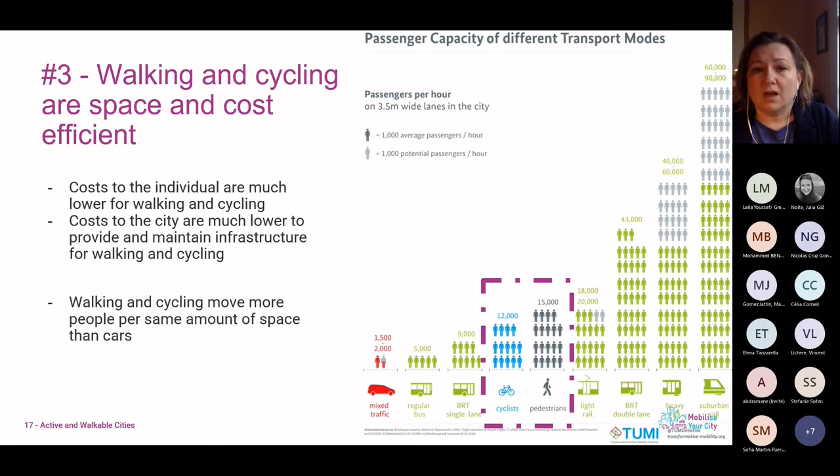Next slide. The third thing, from a mobility perspective, is that walking and cycling are space and cost efficient. The costs to the individual are much lower for walking and cycling, essentially free for walking. And the costs to the city are much lower to provide and maintain the infrastructure for walking and cycling as well. We also see that walking and cycling is space efficient. The graph on the right is from TUMI, and it looks at the capacity of passengers per hour in a 3.5 meter wide lane, and walking and cycling has a high throughput, especially compared to mixed traffic. Next slide.

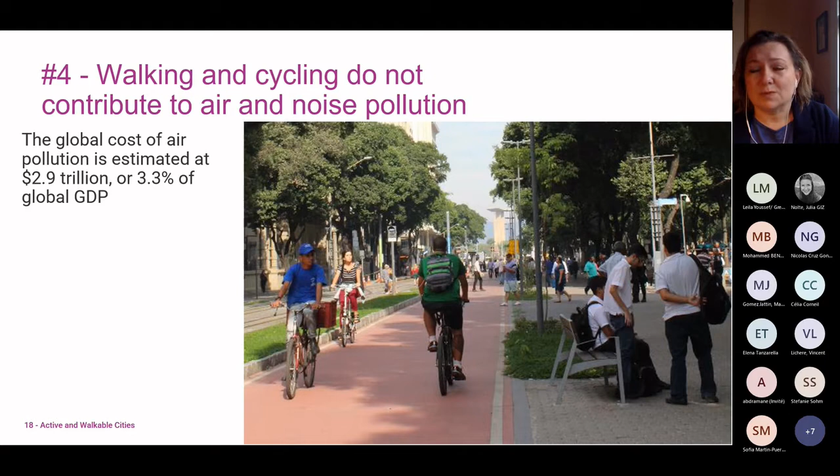Walking and cycling do not contribute to air and noise pollution, which is a big issue in cities. The global cost of air pollution is estimated at $2.9 trillion. More research is coming out talking about the impacts of air pollution on health and noise pollution on mental health, especially for the cognitive development of children. I think we're just beginning to scratch the surface of how detrimental air pollution is to us. Next slide.

Walking and cycling are inclusive and equitable. They're the most affordable forms of transport, and they're available for a lot more people, the older and younger alike. Kids can't necessarily drive and can't necessarily navigate transport systems, and older people may prefer to walk or not be able to drive as well. Next slide.

The sixth reason why walking and cycling are great is that they promote health and well-being. Non-communicable diseases are killing 41 million people a year, 71% of all deaths globally, and 77% of those are happening in low and middle income countries. By walking and cycling, you're getting exercise and helping protect your health. There's also a well-being aspect: you're interacting with your community and your environment. And the last piece is mental health, which walking and cycling can also help with.

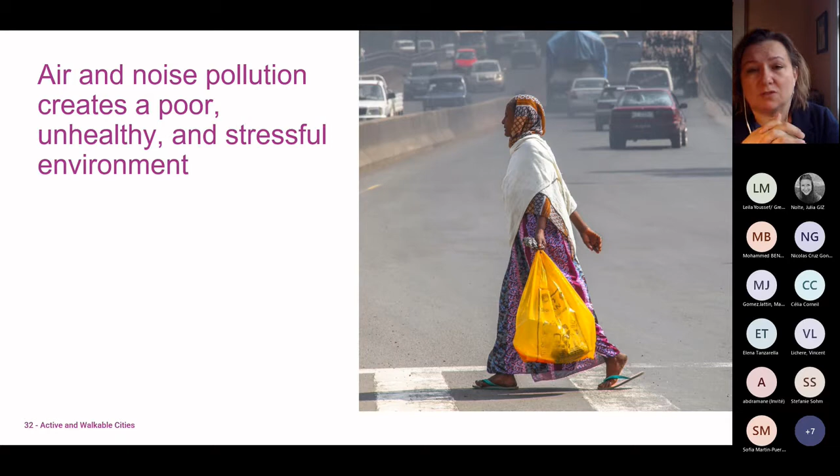Air pollution and noise pollution create poor, unhealthy, stressful environments, especially from vehicular traffic.

And really critical are the crossings—they're chaotic and dangerous with fast traffic. It's not always easy to cross the streets. These are really important things to consider when you think about walking and cycling.

And I'll stop there. Thank you, Verena. Thank you very much, and perfectly in time still, so no worries.

Thank you very much, Aimee, for that quick run through of how important active mobility is, and also some insights on the barriers. We wanted to take some time to dive into this topic a little bit deeper, to reflect on the challenges and barriers that, maybe in addition to the ones Aimee just named, you're also experiencing in your work or in your daily life.

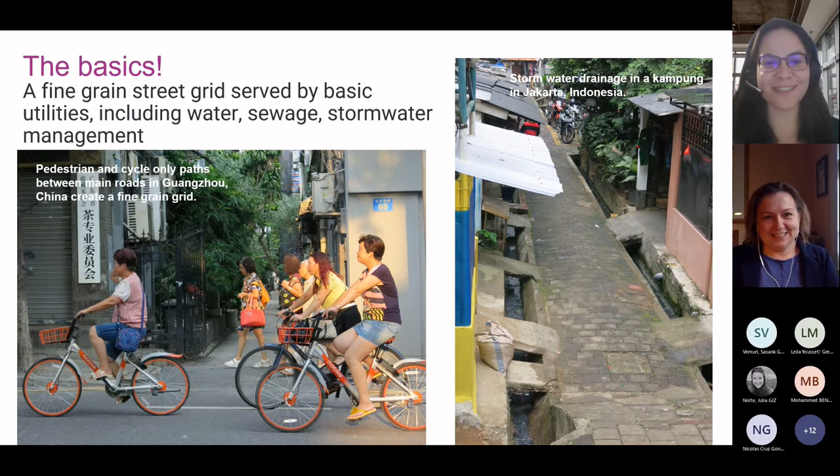Thank you so much, and thank you all for contributing to the barriers. I think, again, we all kind of face similar things, even though they're in very different contexts. So with the solutions, it's kind of a similar thing - there's some key principles to making walking and cycling better.

The first, again this starts where I left off, is the basics, and that includes having a fine-grained street grid. Like in the picture on the bottom left, it's Guangzhou, which has a street network that is also intersected by pedestrian-only or cycle-only paths between those main roads, allowing for a lot more connectivity for walking and cycling specifically.

The other thing is having your basic utilities taken care of, including water, sewage, stormwater management. This is going to become increasingly important as we deal with climate change and the climate crisis. We have to invest in these basic services because we're going to see flooding and just a lot more intense events happening.

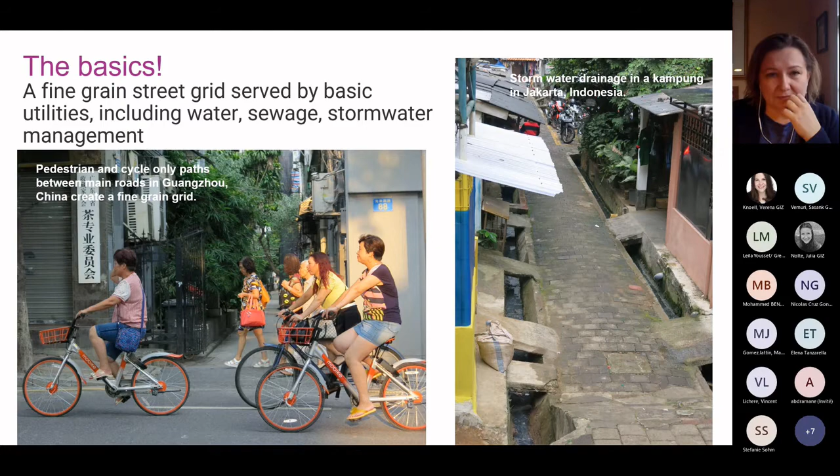The next slide, hopefully y'all can see - if you guys can't see it, just holler - is dedicated protected networks. I want to focus on networks because it's about being able to use these networks to reach the whole city. A lot of times people will put in just one bike lane that goes along a main corridor, but doesn't really connect to anything. If you're really thinking about how people are moving through the city, they're usually not just on one main corridor, they're trying to connect to different parts of the city. So networks are really important.

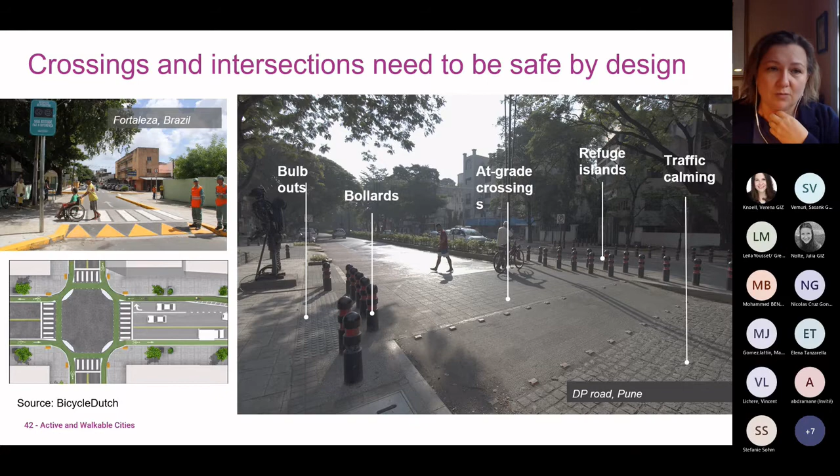On the picture on the right, this is from Pune. You see all the different components of making a safe crossing: bulb outs, which minimize the crossing distance; bollards that protect from encroachment; at-grade crossings, the tabletop crossing; refuge islands between multiple lanes of traffic; traffic calming devices like tabletops, raising the cars having to come up slows them down, as well as different paving styles. Then thinking about cycling, how do you prioritize cycling in the intersection, make it visible to drivers and other modes - that's really important to do as well.

They need to be sufficiently wide, a sidewalk for both cycling and walking. For a sidewalk, it's a complex system - there's a lot of activity that happens there. So you have the frontage zone, which is kind of the place of coming in and out of buildings.

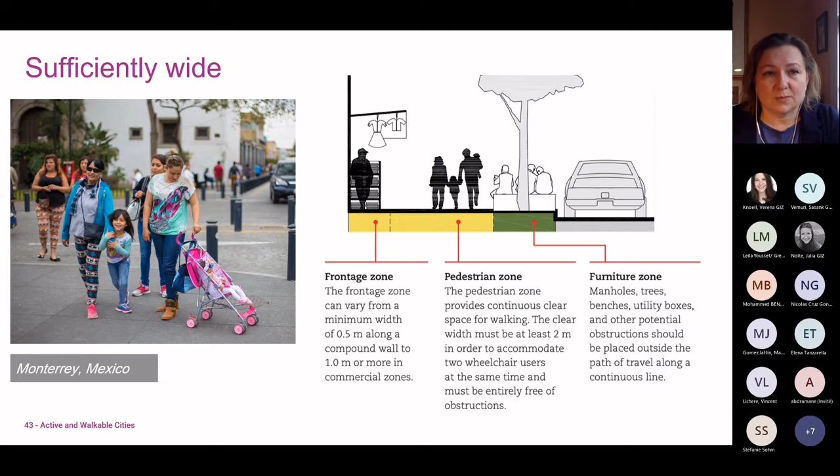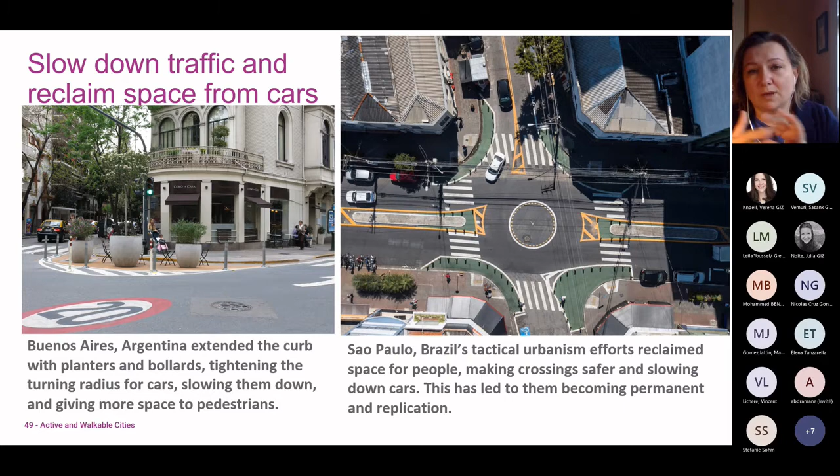This is in Nairobi, but again, having protected space, having shade from trees, having seating, and active frontages are all really important. Another thing that came up in barriers is that traffic is too fast, so you can slow it down by reclaiming space, essentially slowing cars down by design, because enforcement can be difficult. In Buenos Aires, they extended the curb through bollards and planters, put in some seating, and made it a low speed zone, shown by the 20 kilometers per hour sign. In Sao Paulo, Brazil, they also reclaimed space by extending the curb and creating a roundabout. All of these things help slow down traffic.

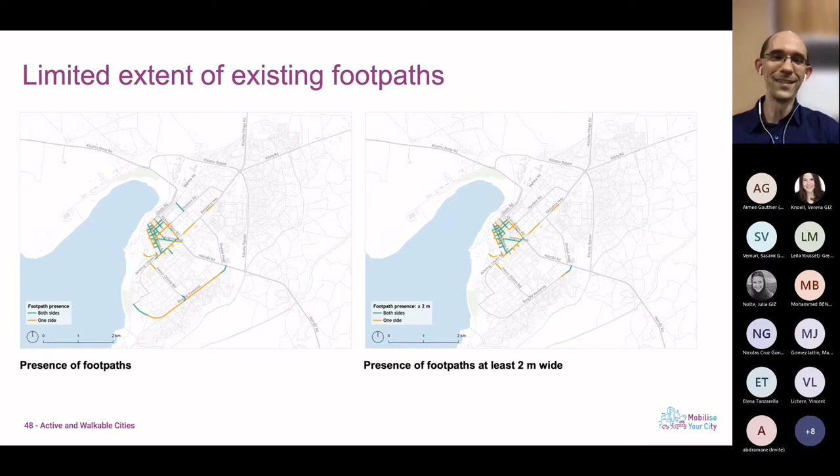We mapped this out as part of the mobility plan we helped the city prepare. What you can see here is that very few streets in the whole city had footpaths on both sides. A few more had a footpath on one side. If you filter that down to streets with at least two meters of clear width, and Aimee talked about the footpath zoning system and the need for minimum space so two wheelchairs can pass and you can handle the volumes, then there are even fewer paths that meet that requirement. If you further refine it to streets with footpaths where the two meters are clear, it's even fewer. So there is definitely a need to improve the facilities.

Another challenge has been that a lot of streets don't have proper crossings, especially outside school zones, this was a real problem. Speeds were very high, and it was hard for people to move around. Same thing with cycling, lack of cycle facilities, people moving in mixed traffic. And cycling is predominantly young male risk-taking cyclists. As Aimee was saying, if we continue to expect people to cycle in mixed traffic, we're not going to open this up to the full community.

Another thing that was evident was that a lot of the recent road projects had widened the carriageways, but led to a lot of safety challenges. You can see in this case where there's a service lane alongside this newly expanded road, and the community had to come out and build a speed bump in it to get the speeds down and make it safe for kids to cross on their way to school.

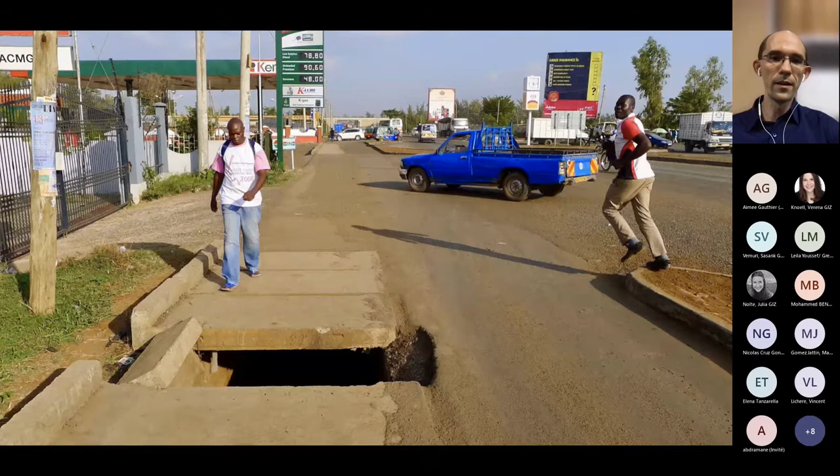So these streets were definitely not safe by design, and that led to a lot of challenges for the communities. And then the construction quality was very poor, so the space that was supposed to be used by pedestrians had a lot of flaws like this. Drainage covers started to cave in, and it really wasn't safe for people to move around.

That meant that these very corridors that had been upgraded in recent years actually became the epicenter of traffic crashes in the city. You can see this whole stretch here on this big highway that stretches through central Kisumu, seeing the majority of the fatal crashes over the years since the road was upgraded.

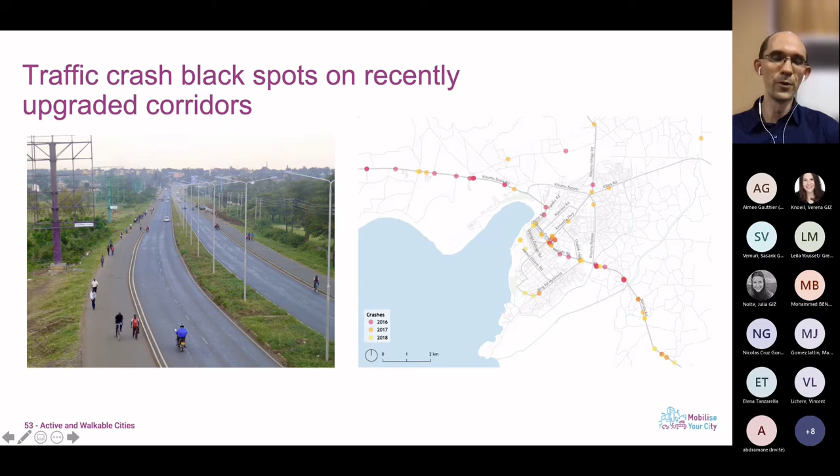So those are some of the key issues that the city had. To help address this, ITDP and UN Habitat went to support the city in developing the Kisumu Sustainable Mobility Plan. This plan outlined a comprehensive set of interventions dealing with all realms of mobility, from public transport to parking to land use transport integration. One of the key elements was NMT, because given the city size and the fact that more than half of trips are either by foot or cycle, it was key to invest in this area.

So the proposed NMT network that we developed looked at key issues like where are the black spots, where are the heavy volumes of pedestrians and cyclists that we need to accommodate with better facilities. We came up with this 100-kilometer network of improved walkways, and in addition, 31 kilometers of cycle tracks, making sure that all the main arterial streets, including all streets with 2 or more lanes of mixed traffic per direction, would have cycle tracks.

There are additional opportunities for greenways along the lakefront to serve as an alternative to the busier streets, and also to enhance the tourist potential of the city. Then the 28 kilometers of those new highways that are having a lot of safety challenges—that was one of the key priorities. And then finally, improving safety in the school zones.

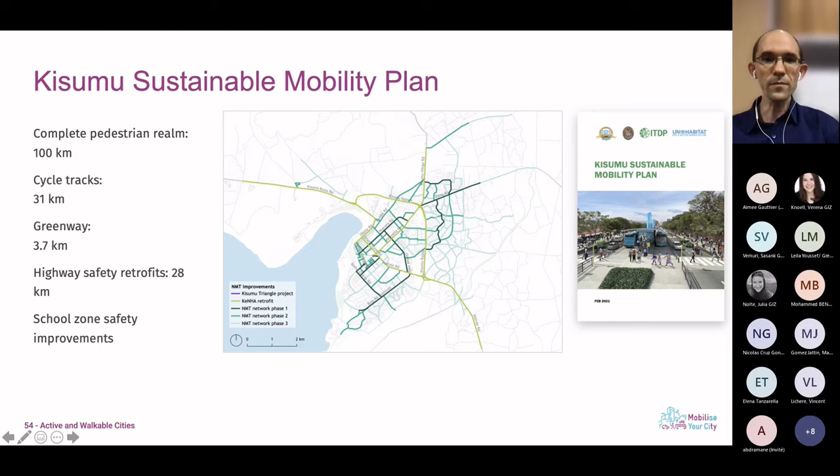So out of that network, even as we were preparing the mobility plan, the city embarked on this demonstration project to start upgrading the walkways. This was known as the Kisumu Triangle Project. It covered 1.5 kilometers of streets in the city center, with a total cost of about 241 million Kenyan shillings, about $2.2 million at the time.

It was financed through a World Bank project, where the World Bank gave a large loan to the government of Kenya. The Transport Ministry in turn gave out smaller grants to individual cities to implement these different types of urban development projects, including the Triangle Project. So it included a variety of interventions.

The footpaths, but also better crossings, the street furniture—there were a lot of new benches, landscaping. The drainage lines were overhauled because the city experiences a lot of flooding; it's barely higher than the level of the lake. So you really need to ensure there's good drainage if you want these walkways to be free of waterlogging.

And then finally, a nice element was that public toilets were included. We have a lot of issues with equitable access to toilets in public space in Kenya, so that was a nice element. There were 2 public toilets introduced as part of the network.

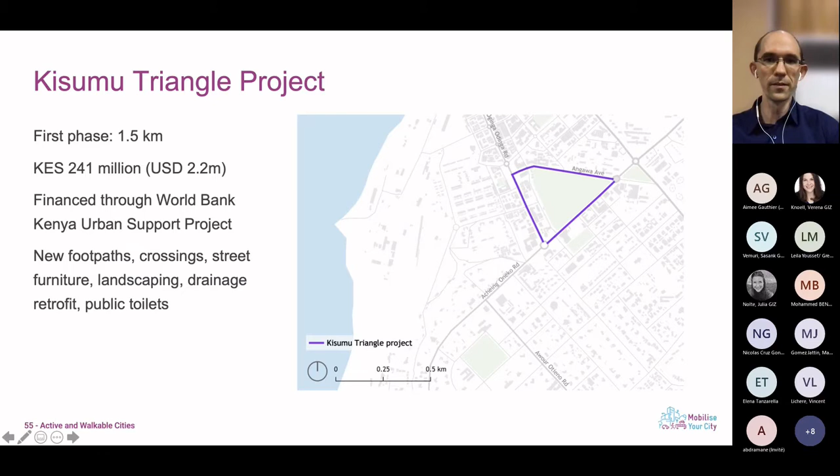So there was a lot of community participation that went into this, going all the way back to 2016 with the first street design workshop—bringing engineers out to see the streets, to understand the issues that pedestrians face and the really abject state of the existing infrastructure, and then brainstorming on solutions.

And this was the result: the new wide walkways have enough space to accommodate pedestrian movement, but also the economic activities happening in the city, and it really transformed the face of the town.

You can see that there is a lot of care put into maintaining the existing tree cover, which was a big break from the way road projects are normally implemented in Kenyan cities, because usually the first thing we do is go in and cut all the trees, and then we have a blank slate to work from. But in Kisumu they took a really different approach of maintaining these trees and customizing the design in each case to make sure the trees could be preserved.

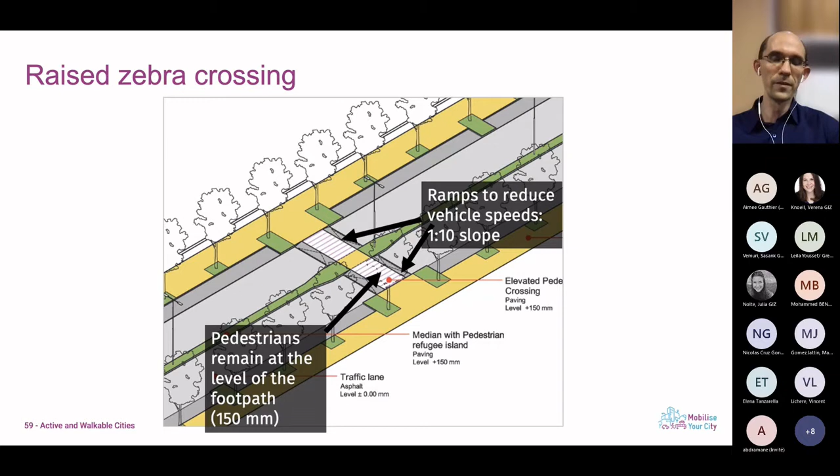Also paying attention to the surfacing and finishing so that there's universal access. Another key thing was making sure the crossings get safer by implementing raised zebra crossings with ramps for vehicles, keeping the crossing at the same level as the medians and footpaths so people have a single surface all the way across. It's actually steep enough for vehicles to slow down. So it's not just an aesthetic intervention, but it's really ensuring better safety through the geometric design.

And then finally, protecting the footpaths - installing bollards, raising them above the carriageway so there's adequate drainage, and making sure these are there for the exclusive use of pedestrians, so we don't have a lot of encroachment from cars on the new footpaths. So that's the product of phase 1 of the NMT projects.

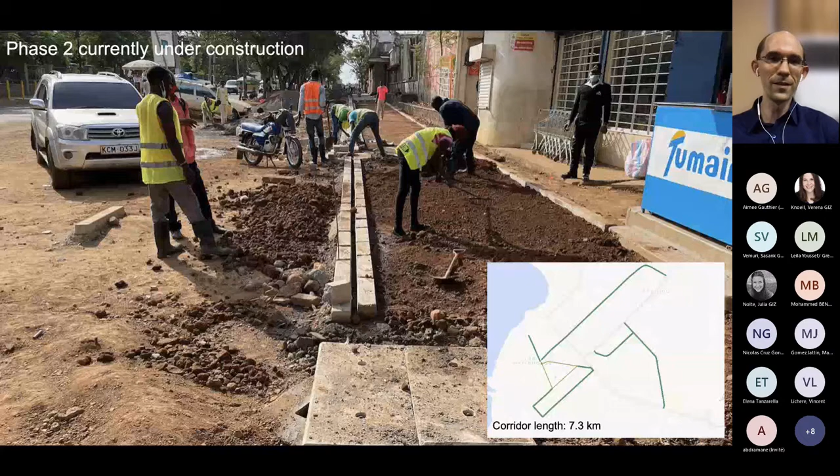And now the city is currently implementing the second phase, which has just over 7 kilometers of footpaths being implemented around the city. The second phase also includes some cycle tracks. So we're hoping this can become a good example of inclusive infrastructure and attract more engineers and planners from around the country to see how to build good facilities.

So that's Kisumu. And then the next case study I want to get into is Addis Ababa, where the city's been making a big effort to invest in the walking and cycling environment, and has been able to scale up those efforts even beyond Addis to the national level.

So again, a lot of challenges, very few cycle facilities across the city, so people are left to fend for themselves. Poor quality walkways, drainage issues, and in some cases the walkways are pretty decent, but they're just not big enough for the volumes of pedestrians who are there.

So the city went about creating this NMT Strategy. It was launched in April 2019, and the strategy is basically a 10-year roadmap for improving the NMT environment. Alongside the 10-year strategy, the city adopted a 3-year implementation plan that went into the specific projects, who should implement them, and how much they're going to cost over that short period. The city's now preparing its second round implementation plan going forward.

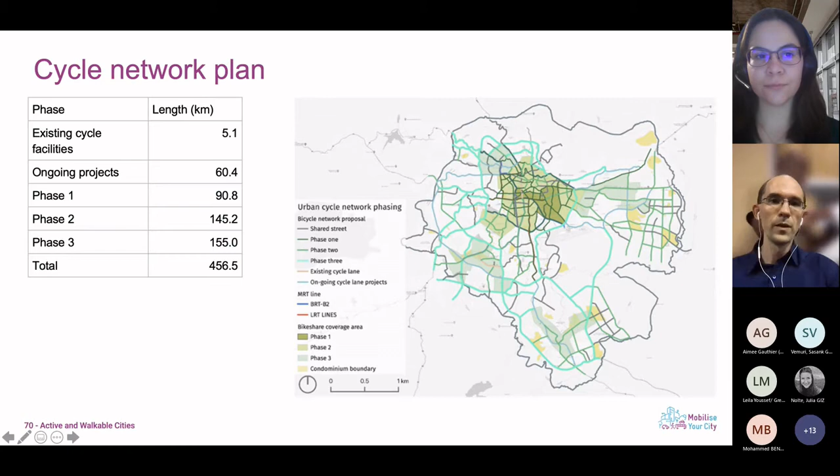So the city went back to the drawing board, trying to learn from these mistakes, and came back with a more contemporary design for a protected bike lane. This was on a corridor known as the Jemo Lebu corridor. With support from GDCI and other partners, the city implemented this tactical project at a very reasonable budget, to get something out there to test out the design and see how it would work.

And so that's continued to attract users, but it still has some issues. There are certain places where cars get in, and so the city's been trying to innovate further to see how to define these facilities so that they're more clearly differentiated from the roadway.

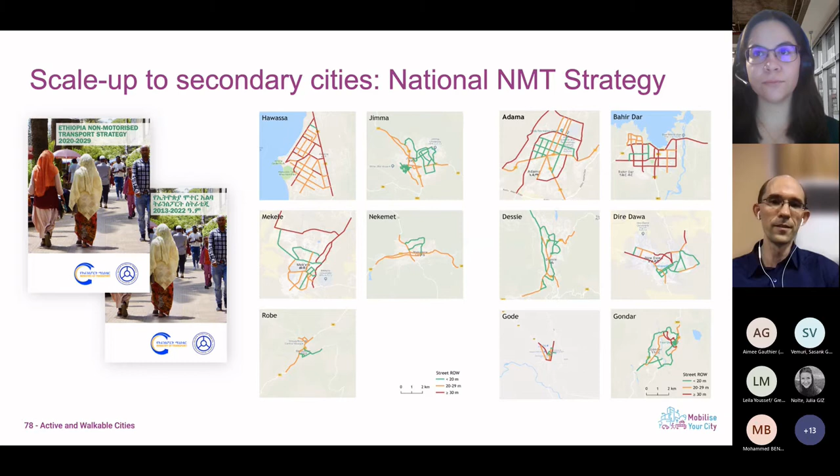Just to conclude, one of the nice developments in Ethiopia has been the scale up. Following the success of the Addis NMT strategy, the Ministry of Transport also prepared an NMT strategy at the national level, and it identified goals for the key secondary cities and how to scale up these measures across the country. And it's had strong political support. The Transport Minister chairs a national NMT steering committee that brings together the different agencies involved in the design and planning of the NMT environment, and they're helping to see how to bring good NMT facilities to all of the important towns and rural centers across the country. So with that, I'll wrap up, and we're happy to take any more questions.

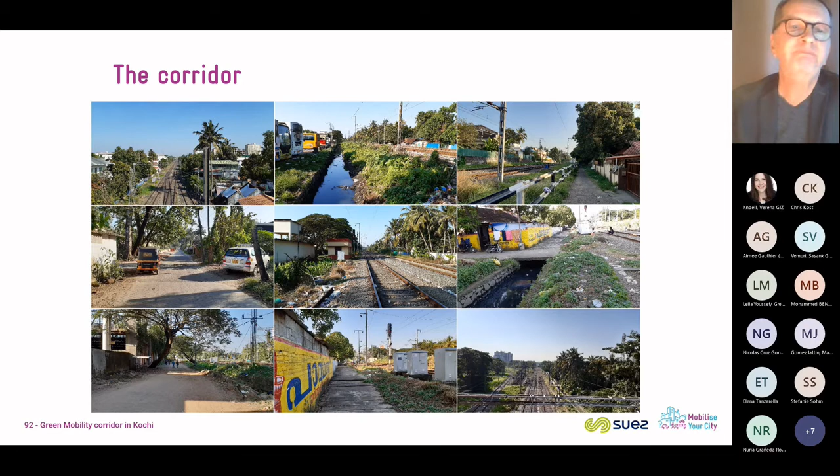So it's a project of urban mobility, but much more than that. There is this goal of improving the connectivity, creating or improving links between the bus terminal, the railway and metro stations, the stadium, and the hospital. The links were to be developed with the city center, and also the project is seen as a way to relieve congestion on parallel roads.

But there is also a component of urban management: improving safety and security for all, cleanliness, better control and surveillance by authorities. It's a place that is impossible to manage today because there is no access, and improvement of the drains. More widely, inclusion in the city, step by step, turning this somewhat backyard area into a lively urban space, including social and economic activities.

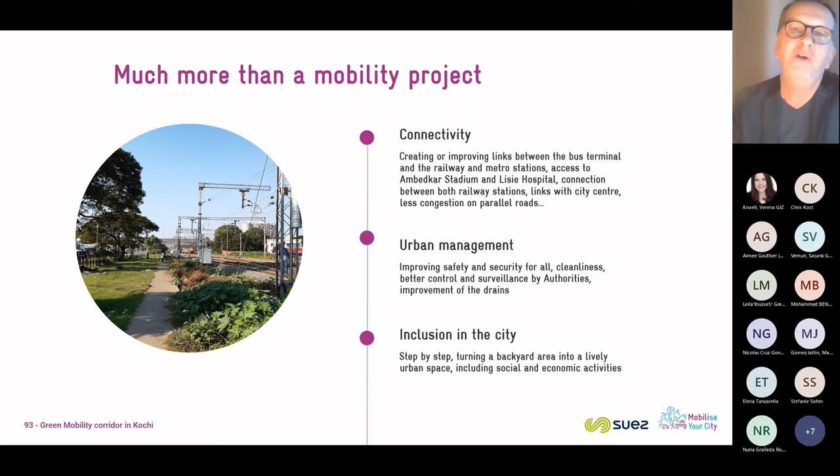And the goal of the project is to solve these several problems with one solution. Next.

So the project was developed with 4 components. The first one was really non-motorized transportation, what we call the green corridor, adapted to walking and cycling. In parallel to that, there was the idea of developing electric rickshaw services.

Third component: development of hubs and connections to the city centers, so connection between the corridor and perpendicular roads, and then development of social and commercial activities along the area. Next.

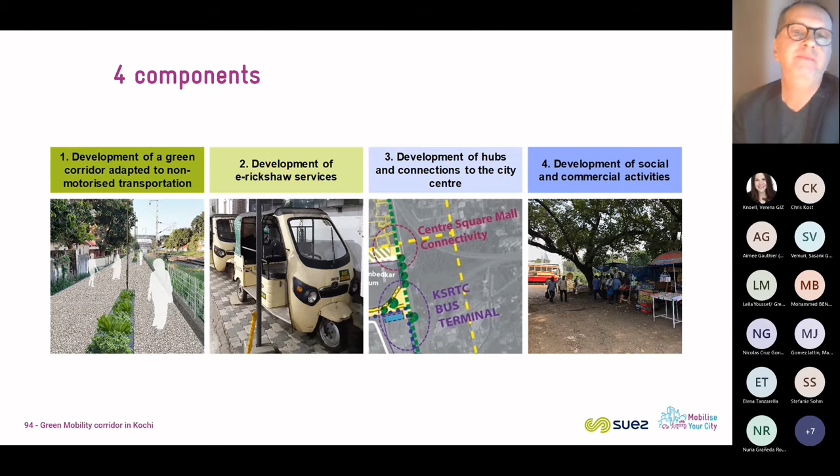The study lasted for about 6 months. We began with data collection: site reconnaissance, topographic survey, some mobility surveys too. So we made counts of vehicles, of pedestrians, and also some interviews of people to understand the origin and destinations, the purpose of the trips, the expectations, the problems. We also surveyed the land ownership along the corridor.

Based on that, we made an urban and mobility diagnosis that helped refine the objectives of the project. There are, as always when this kind of project is launched, already objectives, but the diagnosis helped to have a clearer idea of what should be the target. This first part lasted about 3 months, and then 3 more months to develop the mobility improvement plan and evaluate it. Next.

We proposed some design principles. As much as possible, we tried to develop the project in the existing right-of-way, because one of our objectives was that it could be implemented rapidly, and land acquisition is always everywhere something complicated. So we tried to find a solution fully adapted to the existing situation of the corridor.

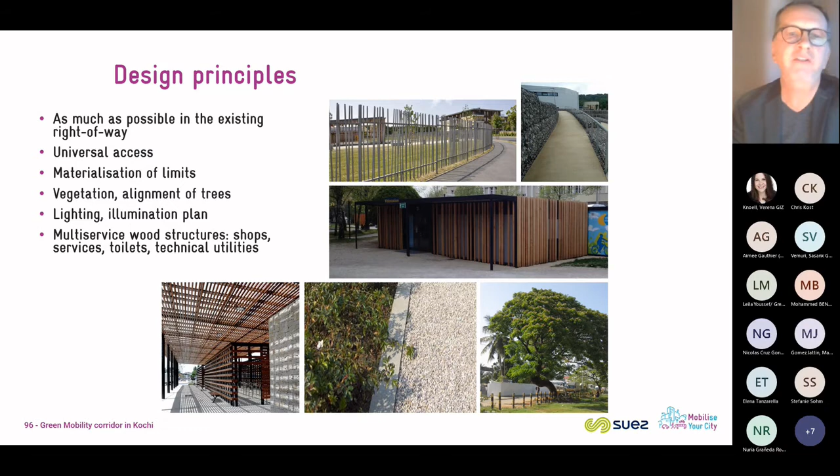These are just examples, not constructed already, but the idea is to have an identity, a visual identity along the line and along the corridor, having the structure for shops, services, toilets, and technical utilities. Next.

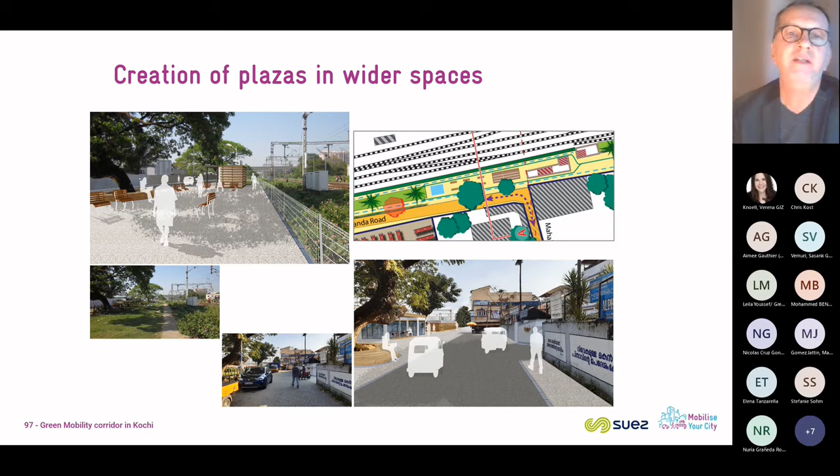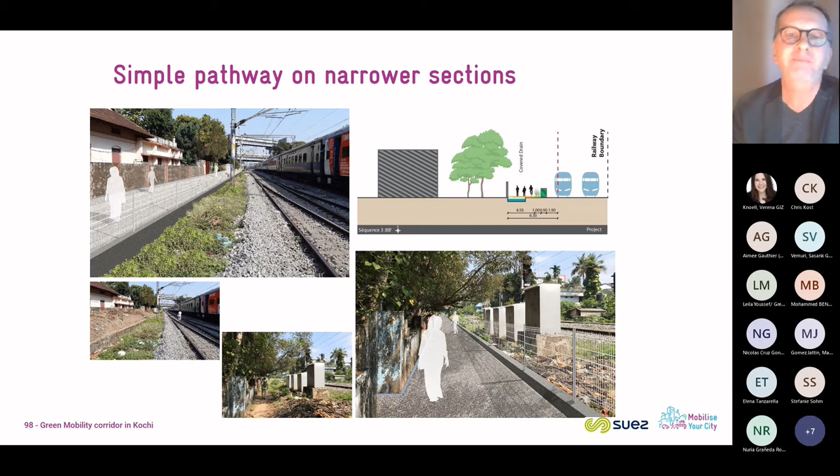In some places, we have room enough to create plazas and incorporate some shops and develop public spaces. Next, we see other places where it is much more narrow, and where we just need to develop a safe and convenient pathway, as we see in the before and after pictures here.

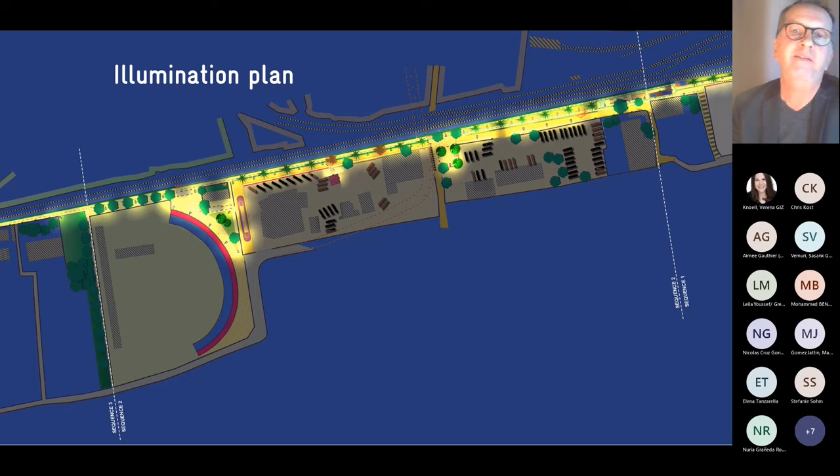An extract of the illumination plan. We propose a combination of lights on light poles and lights on the ground, at ground level, to highlight the various areas along the corridor.

When it comes to evaluation, we based it on our surveys. We tried to estimate the future frequentation, or ridership, of the area, and it would be formed in majority by former non-motorized transportation users, pedestrians and cyclists, but also from former auto rickshaw users, a small part from private vehicle or cab users, and then what you call induced demand, people who would not have moved if the corridor was not developed.

So the frequentation is estimated at 11,000, which is not so much at the city level, but it's along 2.5 kilometers. So it's quite a lot for the size of the area.

And all the more if you consider the number of people that would be impacted by the corridor: 20,000 people living within 500 meters of the corridor, about 30,000 including people having daily activities. We also estimated the number of vehicle kilometers transferred from motor vehicles to green modes, and the quantity of CO2 emissions saved every year.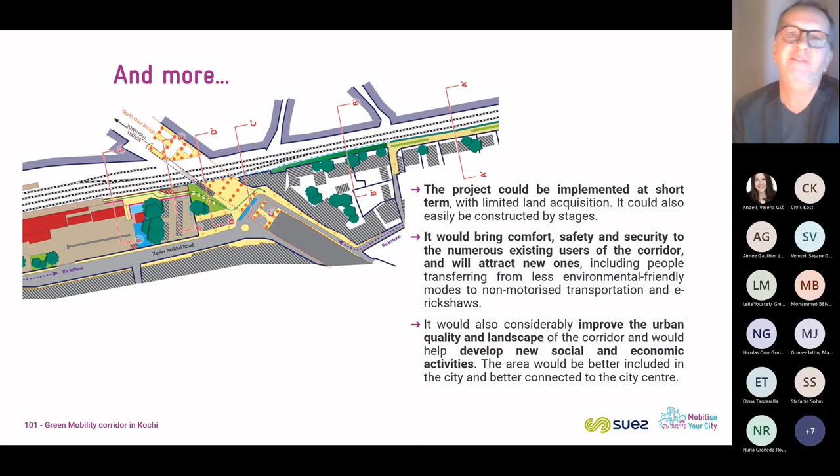A short video that we made. Maybe you need to click just to begin it. It's a very schematic 3D model, just to fit inside our budget. Can you click on the arrow, or maybe I can do it? Okay. But it helped to show what the project was. So it's an interactive model, and we made this video just to show it.

What about the project today? It has been reviewed and updated by the technical department of the municipal corporation. They have complemented the surveys, and now they are about to launch the next stage of the project, as per Indian regulations, which is called the detailed project report, for further implementation. I hope it will go all the way and be implemented rapidly, because actually the project is quite simple.

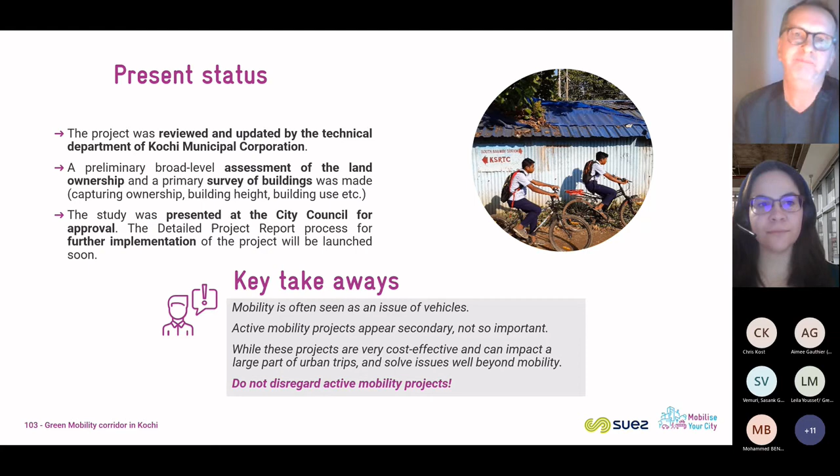Thank you very much for that presentation. Certainly also very insightful and interesting. I think it's especially fascinating because it really shows that people are actually already walking in these environments, even though it's alongside a railway and not very safe. So it really makes sense to consider active mobility there because it is already there and there's just no infrastructure. I think that's a perfect example that showcases this.

There's some time now for questions, so if you have them, feel free to post them in the chat. Meanwhile, I also have a question, because I feel like these estimations you showed of how many people might be using this corridor are very relevant if you want to convince people to build and implement this project. I can imagine that based on the diagnosis you did alongside the corridor, you can estimate how many people currently using it are going to continue to use it. But how did you go about estimating how many people might switch to the modes there? How did you do that?

It was mostly based on the declaration of people, their intention, and then also the analysis of the origin and destination and the efficiency of the system. But to be frank, it was made in the spring of 2020, and I'm not sure of the details, I should check.